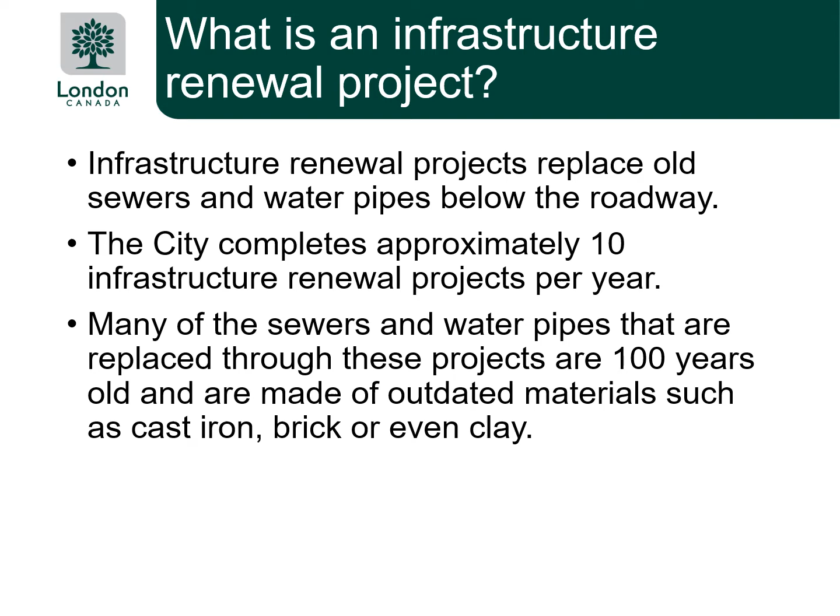This map shows the limits of the project. Foster Avenue will be reconstructed from Riverside Drive to Edinburgh Street. Upper Avenue will be reconstructed from Riverside Drive to Foster Avenue.

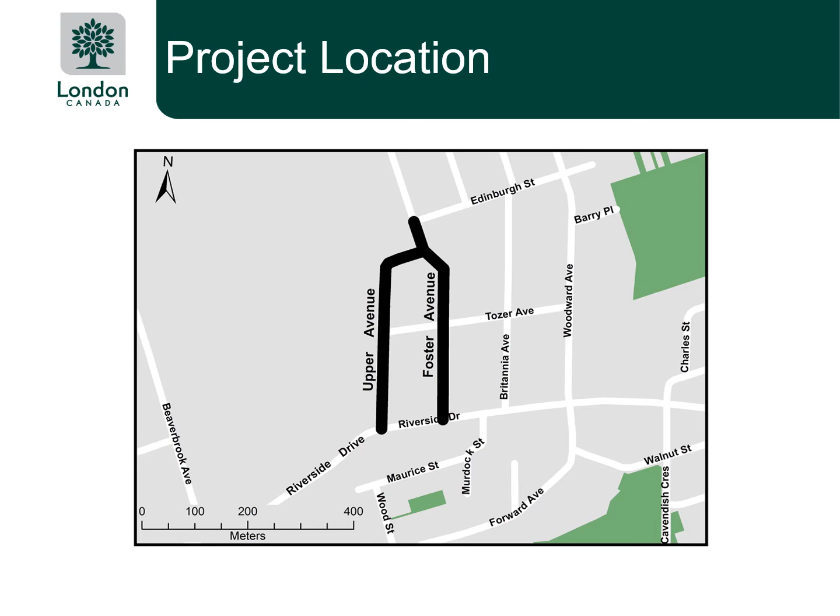Here is a summary of the existing sewers and water pipes that are being replaced. The water pipes in this area were not all installed at the same time. Some date to 1946, some to 1949, and others to 1968. These water pipes, which are made of cast iron or ductile iron, are 74, 71, and 52 years old, respectively.

Storm sewers in the area are made of concrete or clay. They were installed in 1928, 1942, and 1948. This makes them 92, 78, and 72 years old, respectively. The sanitary sewers were built in the mid to late 1960s. Even though they are over 50 years old, a thorough evaluation has determined that they are still in good condition.

Therefore, the main sanitary sewers are not being replaced. However, the individual private drain connections, or PDCs, to the sanitary sewer from each of the homes will be partially replaced.

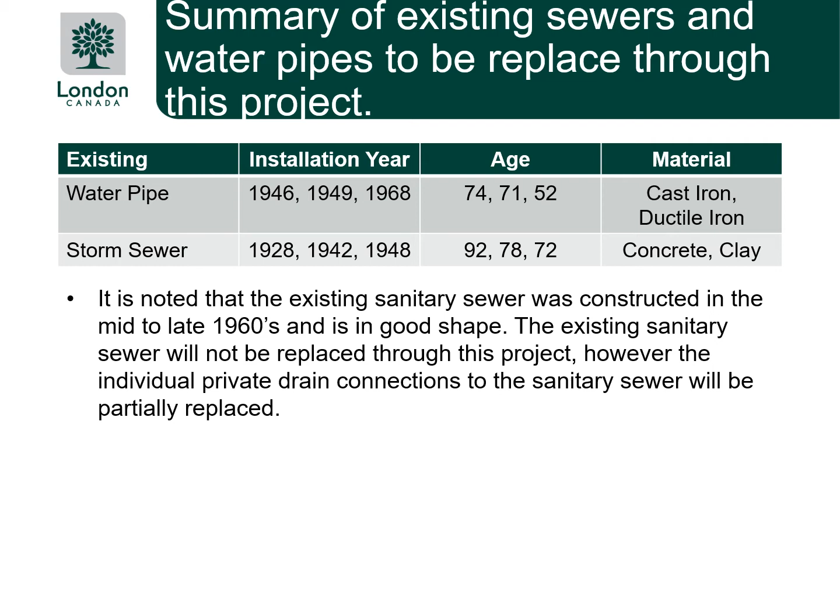Here is a drawing showing the typical arrangement of sewers and water pipes. In blue, you can see the water pipes. The long blue line demonstrates the new water main. The shorter blue lines demonstrate the water services connecting each home from property line to the new water main. The long red line demonstrates the sanitary sewer which will be retained. The shorter red lines demonstrate the sanitary private drain connections which will be partially replaced.

The long green line demonstrates the new storm sewer. The shorter green lines demonstrate connections to the storm sewer from catch basins, low impact development features, and from storm private drain connections.

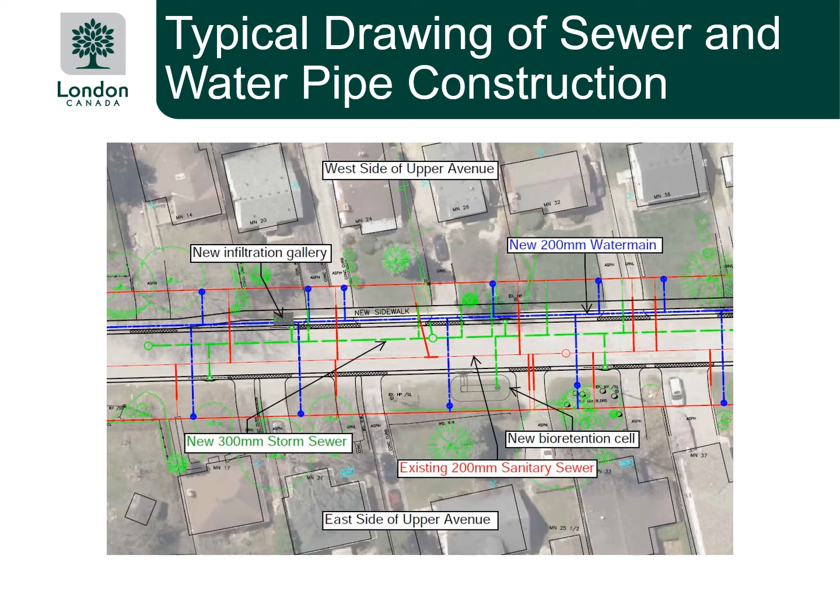How will individual homes be connected to the new infrastructure? Water services will be replaced from the new water main in the street to property line in front of each home. Sanitary private drain connections, or PDCs, will be replaced between the existing sewer main to approximately 2 meters behind the curb of the road.

Most homes do not have storm PDCs, but when encountered, they will be replaced between the new storm sewer and up to approximately 2 meters behind the curb of the road. None of the above service replacements will be at any cost to the property owners.

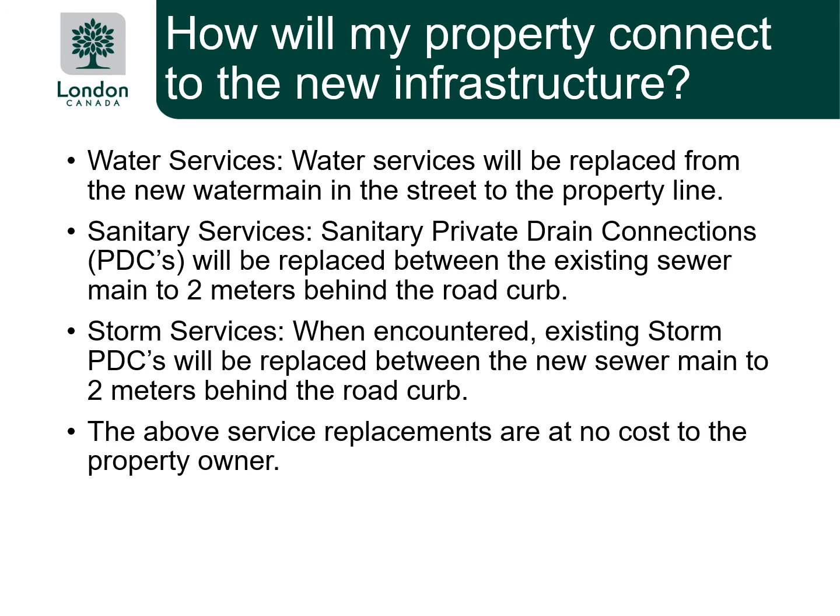Here is a typical cross-section of the road. Here is the water main. The blue shaded line indicates how water services will run from the new water main to property line on each side of the road. Here is the existing sanitary sewer. The shaded red line demonstrates the portions of PDC being replaced from the existing sanitary sewer to behind curb of road.

Here is the new storm sewer. The shaded green line demonstrates how storm private drain connections, when encountered, will be replaced from the new storm sewer to approximately 2 meters behind curb.

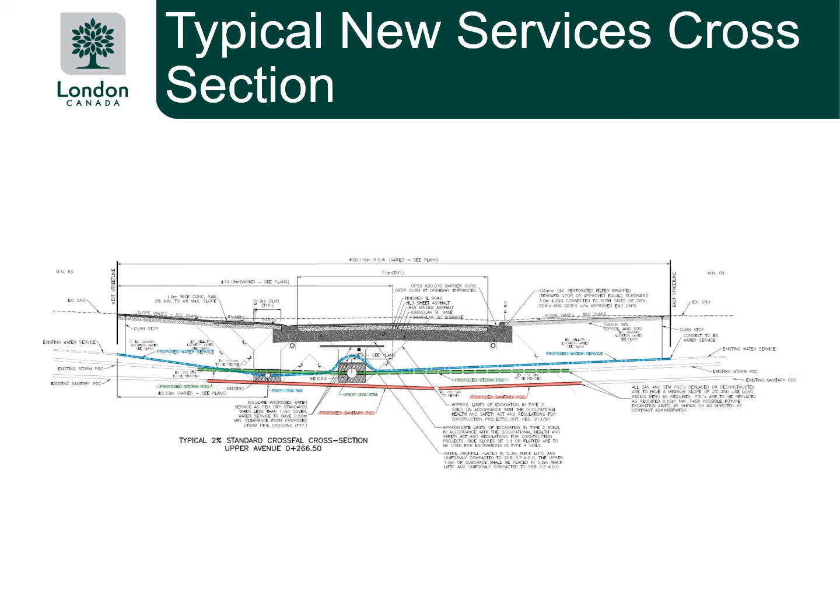When will construction occur? Construction for this project is anticipated to commence in May of 2021. Construction is anticipated to be generally complete by mid-November of 2021. However, some minor construction work may occur the following year, such as the replacement of any curb or sidewalk that may crack over the winter. Also, the application of a second layer of asphalt will occur in the spring of 2022.

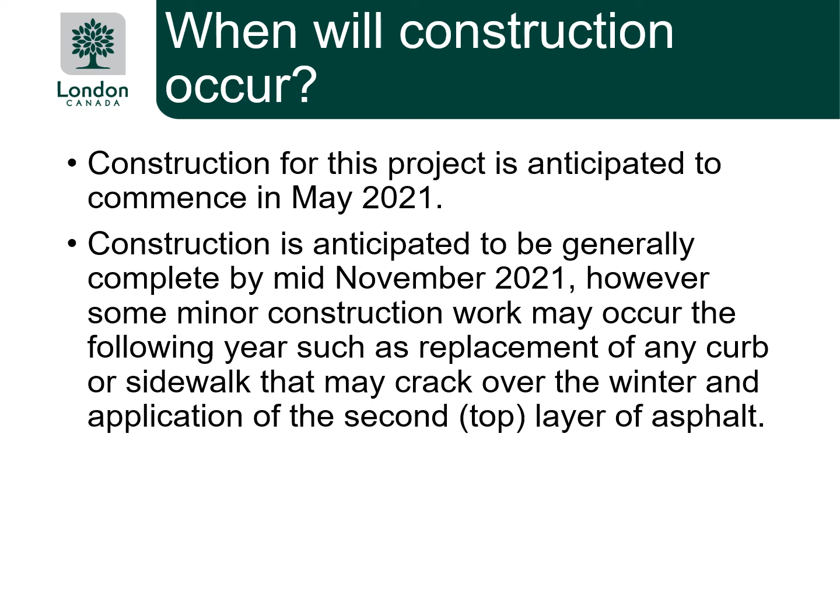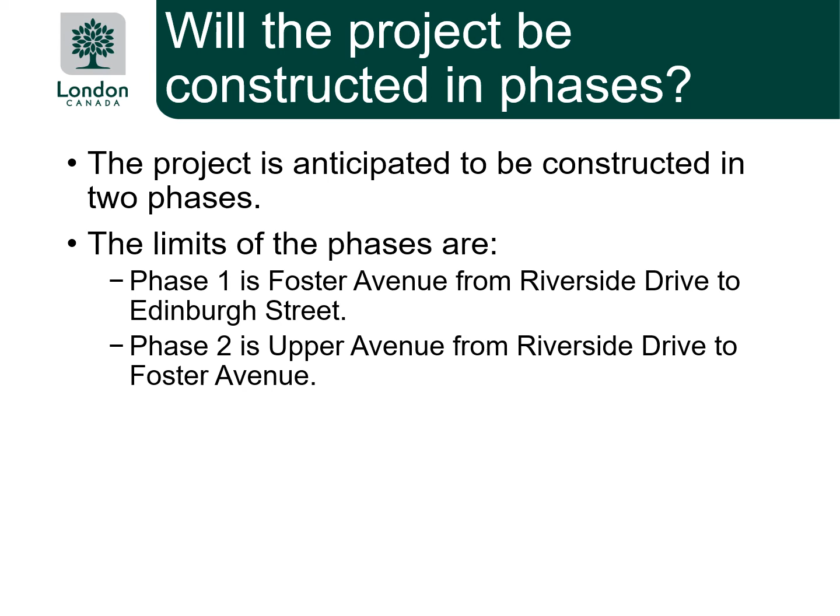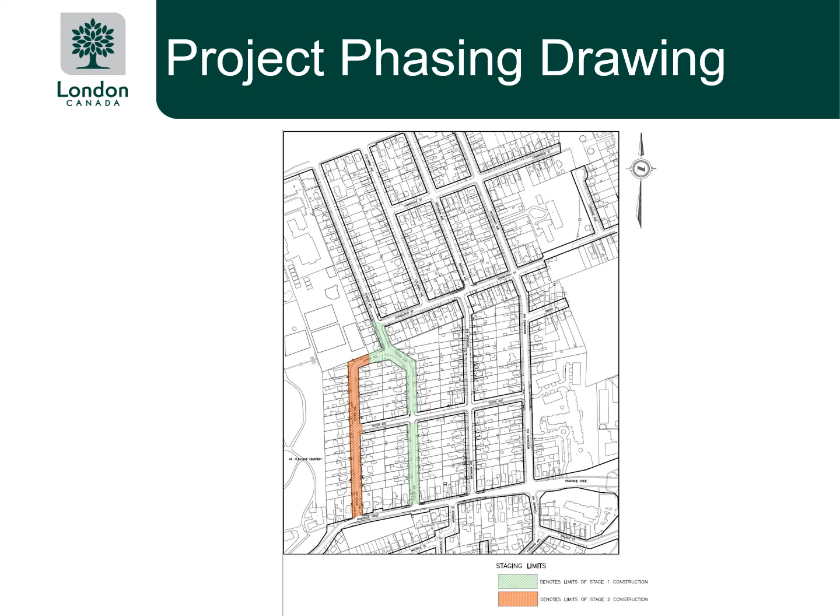Will the construction project be done in phases? This project is anticipated to be constructed in 2 phases. The limits of the phases are, for Phase 1, Foster Avenue, from Riverside to Edinburgh Street. For Phase 2, Upper Avenue, from Riverside Drive to Foster Avenue. Here is a map demonstrating those phases. The light shaded green area is Phase 1. The shaded orange area is Phase 2.

Are there any business or school access impacts? The project will be incorporating phasing to ensure the least disruption possible to school access during the school year. The walking and driving routes to the school access will not be impacted all at the same time. In general, while Foster Avenue is under construction, access will be maintained via Upper Avenue. When Foster Avenue is generally complete, it will become the access, and Upper Avenue will undergo construction.

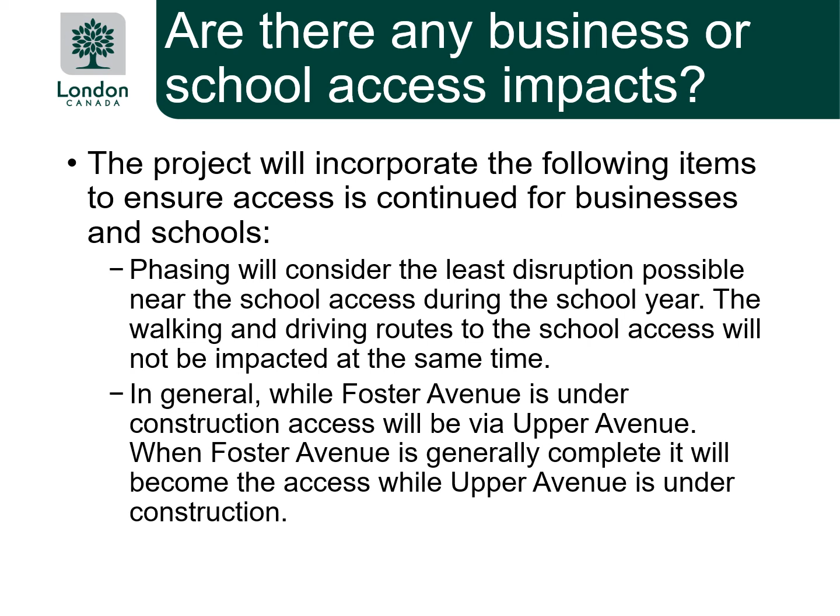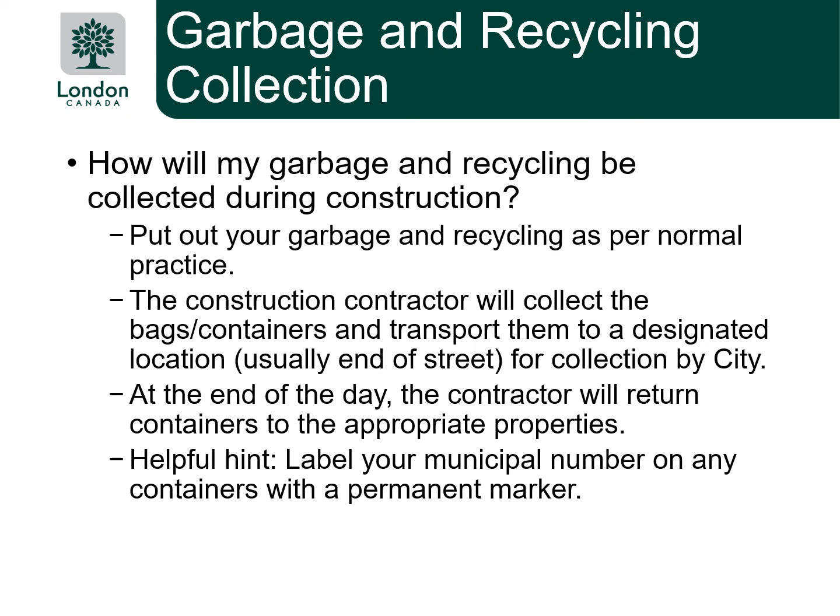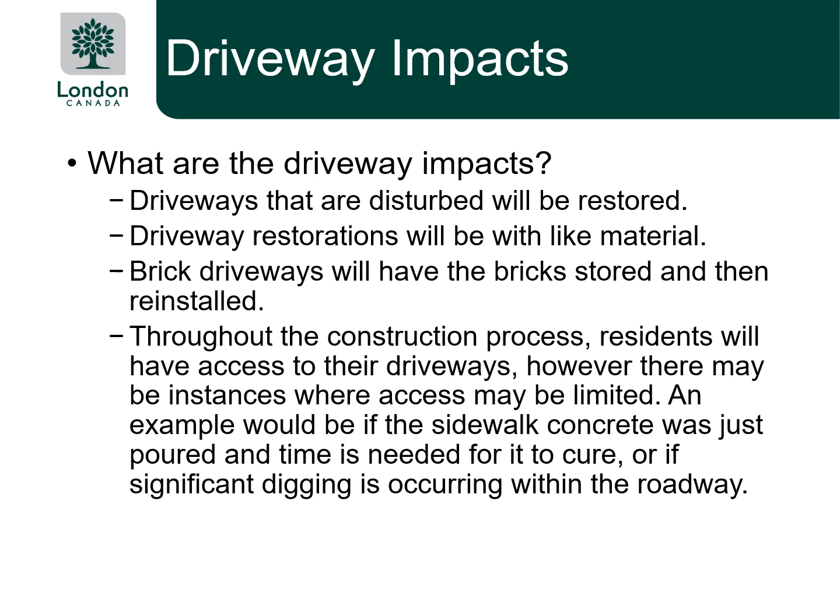The next steps. Construction of this project is anticipated to commence in the spring of 2021. All residents will receive a letter in the mail approximately 2 weeks prior to the start of construction with additional details. You may also follow the project on the city's Get Involved webpage. If you have any specific questions about your property, please feel free to contact the City Project Manager by email at jconrad@london.ca. Thank you very much.